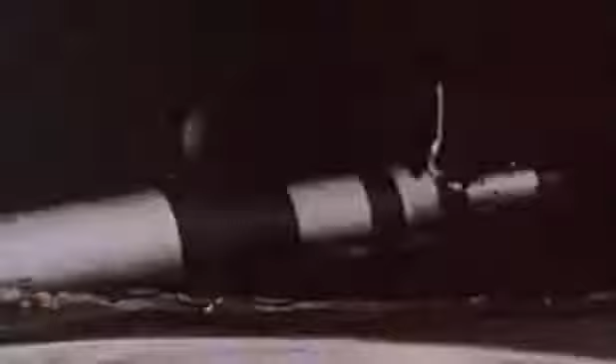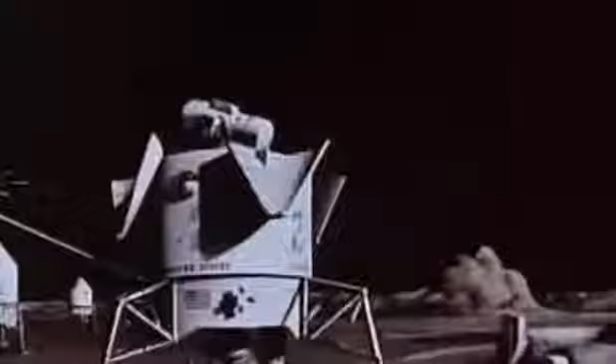This scientific adventure marks the first celestial body that will be explored by man. Landing men on the moon will be a truly great achievement, but only the beginning of a new era in space exploration. No one can predict the exact missions that will follow in the years and decades ahead. But the most exciting possibilities will require the acceleration and deceleration of very heavy loads, such as the maneuvering of large Earth-orbiting spacecraft, the transportation of large amounts of equipment and supplies to the lunar surface, and the sending of heavy spacecraft to the planets.

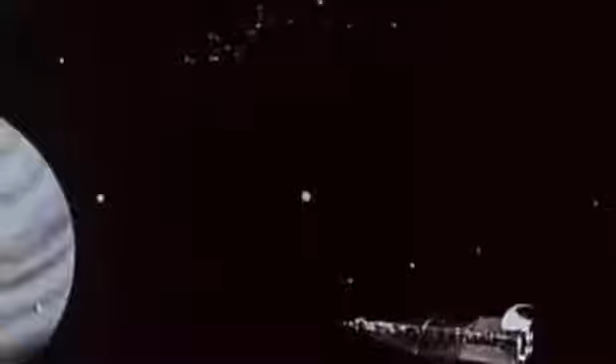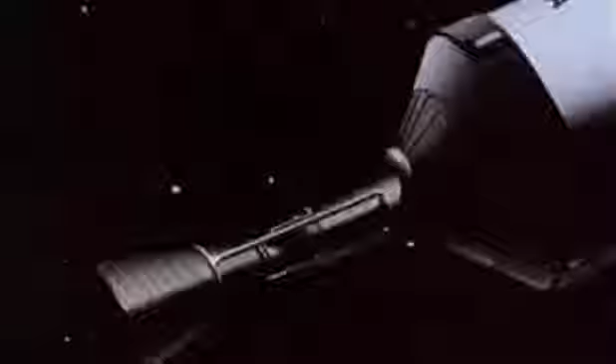Today's missions are being accomplished with rockets that burn chemical fuels. But chemical fuels are heavy, and the cost of putting each pound into Earth orbit is very high. Nuclear rockets, when perfected, can provide the same propulsion energy with less overall weight. They will expand our ability to explore space. This is the story.

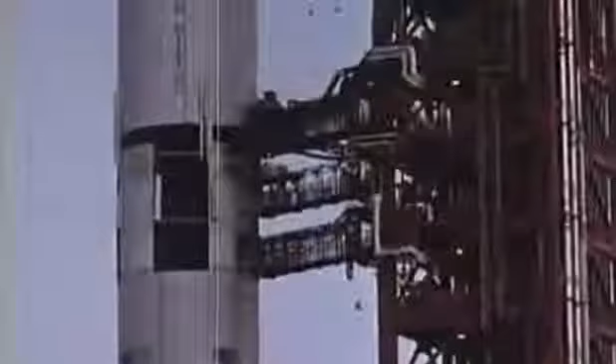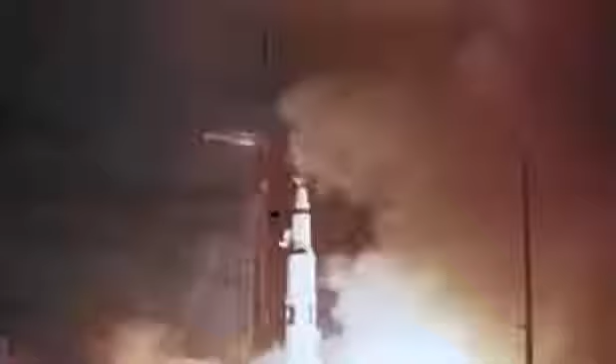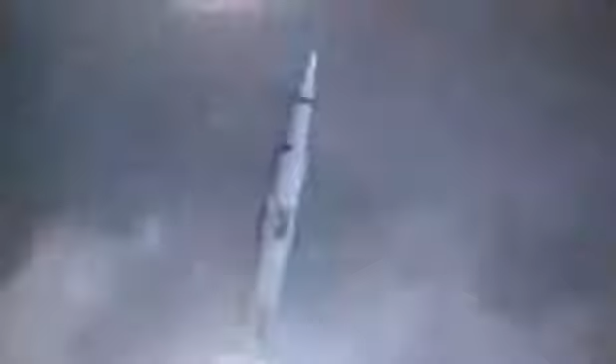This is Saturn V, the most powerful launch vehicle being built by the United States. A three-stage rocket that will place the Apollo spacecraft in the vicinity of the moon. The total weight of Saturn V is about 6 million pounds. Its three stages have chemical engines that burn fuel to generate thrust. The first and second stages provide most of the energy needed to put the third stage and the payload, about 250,000 pounds, into Earth orbit.

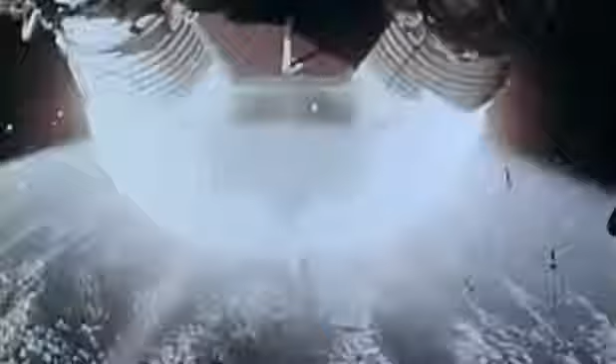At present, only chemical rockets can provide the high thrust needed to do this job. The third stage accelerates the payload to the velocity needed to get it to its destination. Here, travel time and payload weight are determined by the efficiency with which the propellant is converted into thrust.

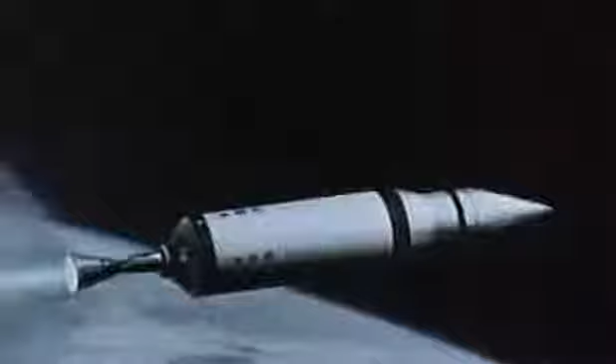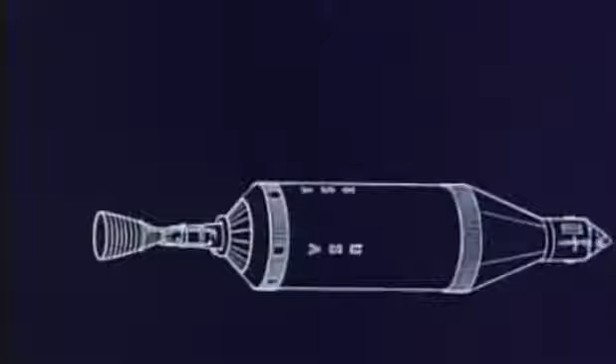By substituting a nuclear third stage for Saturn V, the velocity of a given payload can be greatly increased, cutting travel time for some missions in half. This is particularly important in sending deep space probes to Jupiter and beyond. Or if shortening travel time is not essential, propellant weight can be traded off for an increased payload weight. This is important for a lunar supply mission, Earth orbital operations, and some unmanned missions to the planets.

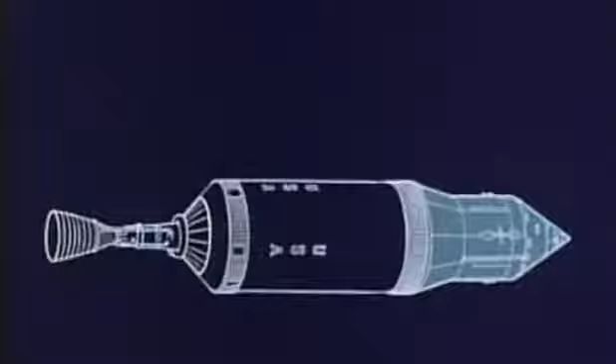Why is the nuclear rocket so much better than the chemical rocket? In rocket propulsion, exhaust velocity determines propulsion efficiency. At a given temperature, the lighter the exhaust gas, the higher the exhaust velocity. And the higher the exhaust velocity, the more thrust is generated for each pound of propellant consumed per second.

The nuclear rocket merely heats hydrogen, the lightest element of all, and expels it at tremendous velocity. Chemical rockets burn fuel to produce exhaust gases that contain heavier elements. So at the same exhaust temperature, the exhaust velocity is much lower, and each pound consumed per second produces less thrust.

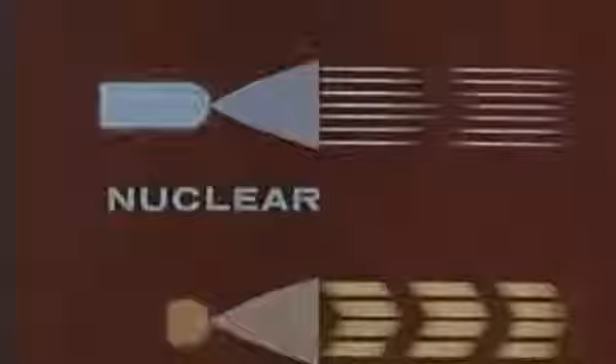Rocket efficiency is stated in seconds of specific impulse. This refers to the time in seconds that 1 pound of propellant will deliver 1 pound of thrust. The higher the seconds of specific impulse, the greater the propellant economy.

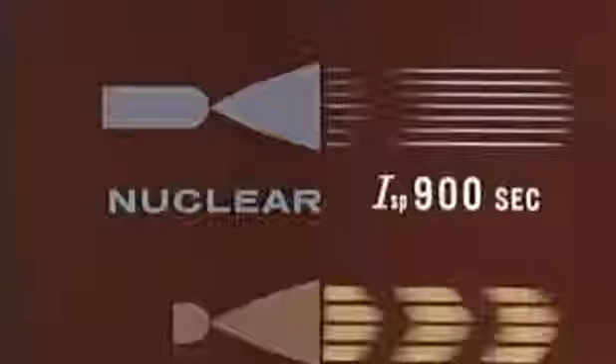Our best chemical rockets of today are limited to a specific impulse of about 450 seconds, and only slight improvement can be expected. On the other hand, full-scale nuclear reactor tests have achieved 800 seconds, and laboratory tests promise even more, perhaps as much as 900 seconds. This means the nuclear rocket, with its lightweight, high-velocity exhaust, will use propellant about twice as efficiently as chemical rockets. This, then, is the principal advantage of nuclear propulsion.

It was at the AEC's Los Alamos Scientific Laboratory, high in the mountains of New Mexico, that the first steps were taken. Here, in the mid-1950s, scientists set about to determine if nuclear energy really could be used to provide rocket propulsion.

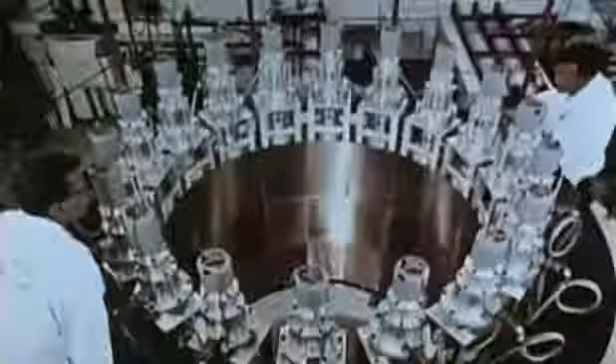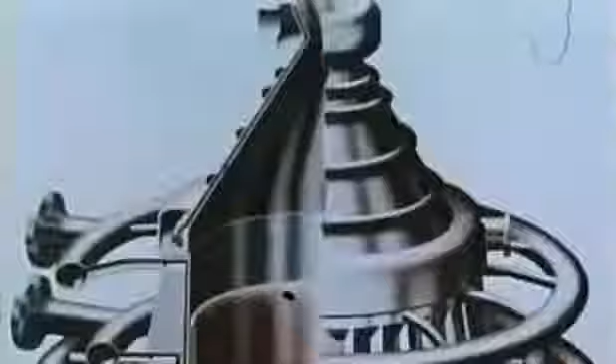Theoretical studies and early experimental work revealed many problems that would have to be solved. Problems in reactor design, material, radiation, structures, control, to name but a few. The nuclear rocket was found to be feasible.

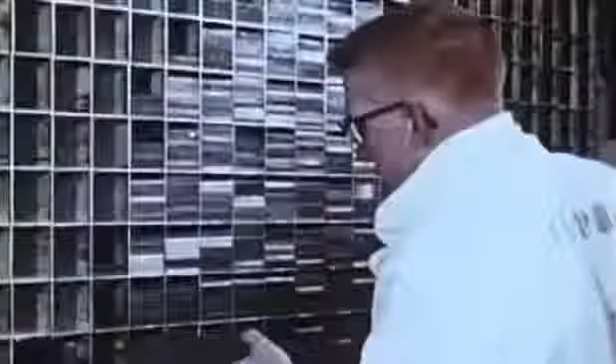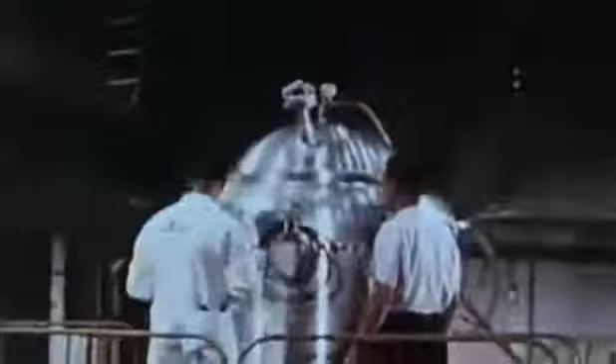A series of experimental reactors was planned to convert theory into workable hardware. Optimum reactor designs were worked out by analysis. Prototypes were built. A comprehensive test program was started. These reactors, called Kiwi, were to be used to prove out design and operational concepts. They would be built only for ground testing.

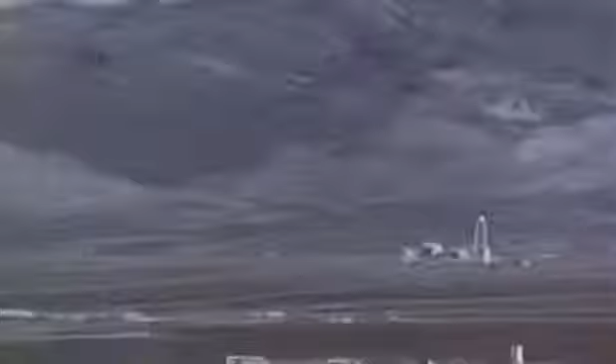All Kiwi power tests took place at the Nuclear Rocket Development Station at Jackass Flats, Nevada. Here in the desert, scientists and engineers checked the actual performance at various power levels and for various time periods.

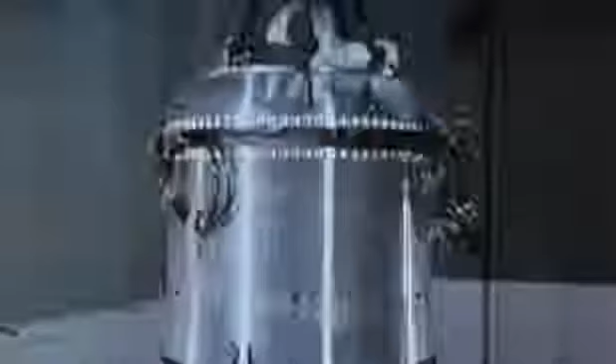Each experimental Kiwi reactor was received in sections, assembled and checked out in a special reactor maintenance, assembly, and disassembly building called simply RMAD.

When the reactor was ready for testing, it was placed nozzle up on a special rail car and delivered to the test stand a mile or so away. This car could be controlled from a remote station. Liquid hydrogen from nearby storage tanks was pumped through the reactor.

First tests were begun in 1959 and were run to the 100 megawatt level, about 1/10 of Kiwi's ultimate goal of 1,000 megawatts. Later tests, beginning in 1962, operated at the full 1,000 megawatts.

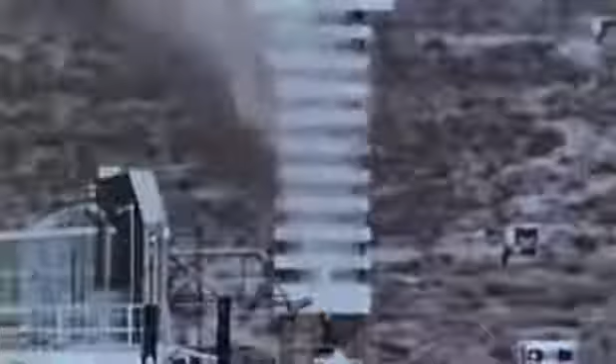Films of these early tests show the flaming torch on the test stand that burns off the hydrogen exhaust gas and prevents an explosion hazard to the test facilities.

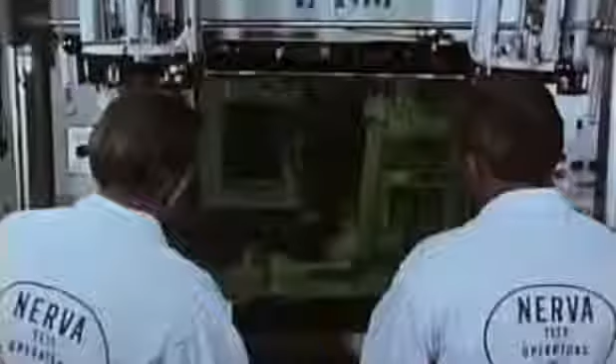Upon completion of these tests, each reactor, by then radioactive, was transported by remote control back to the RMAD building for disassembly and inspection. Here, men working behind shielded walls used remote-controlled manipulators to remove the components for careful checking and analysis. Each test firing added information that helped scientists evaluate the reactor's performance and enabled them to make adjustments and corrections before the next reactor was assembled.

But not all tests showed perfect performance. In this one, for example, the flashing in the exhaust gas indicated a structural breakup caused by excessive vibration. Extensive redesign and testing were needed to correct the flaw.

And in this test, a hydrogen leak caused a fire on the test stand. Again, a correction was made. Each test brought the scientists a little closer to the performance they were seeking.

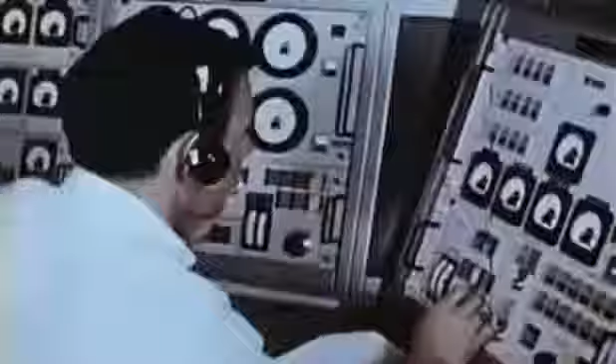Until finally, in September 1964, the 8th Kiwi reactor was brought up to full power and held for 8 minutes, and a few weeks later, it was restarted and operated at full power for 2.5 minutes. Specific impulse, about 750 seconds.

This concluded the Kiwi test series. It had proved that a nuclear reactor could be built that would power a spacecraft.

The next step, already underway, was to develop complete engine technology. This project was called NERVA, Nuclear Engine for Rocket Vehicle Applications. It was to be a combined industry government effort headed by the Space Nuclear Propulsion Office, a joint NASA and Atomic Energy Commission activity. The principal contractors were to be Aerojet General Corporation and Westinghouse Astronuclear Laboratory.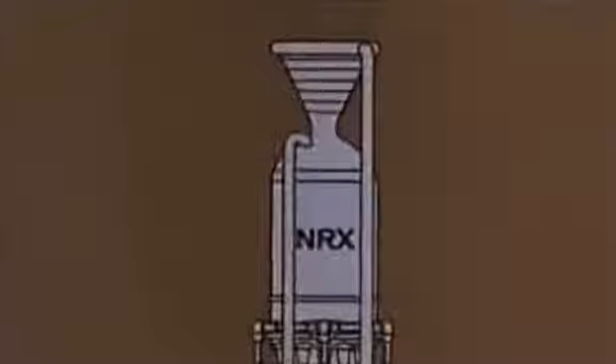The NERVA technology reactor, given the letter designation NRX, was essentially the same as Kiwi, but now the contractors had to extend its lifetime and put it into an engine configuration.

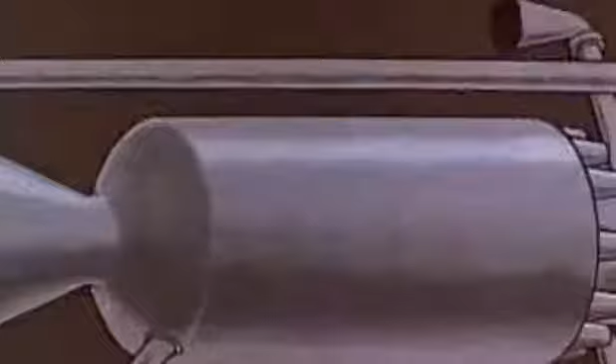Here is how the nuclear rocket engine will work. The reactor is a solid core, heat exchange type, cylindrical in shape. Fission of uranium atoms in the core is the source of heat. A reflector made of beryllium surrounds the core.

The core consists of many graphite elements impregnated with uranium-235 fuel. The core contains a number of channels running down its length. Hydrogen passing through the channels picks up heat generated by the fission process. The channels are coated with niobium carbide, a material which resists the corrosion that would occur if the hot hydrogen were allowed to come into direct contact with the hot graphite.

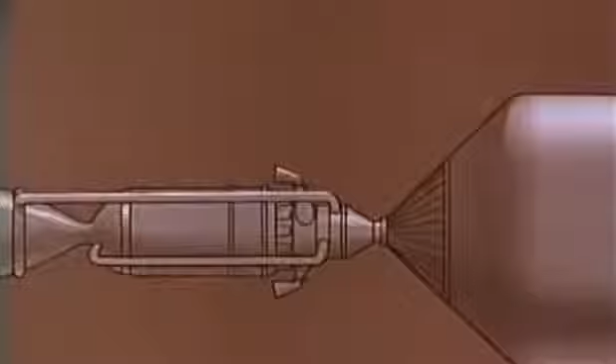The hydrogen is stored in a liquid state to achieve the lowest possible volume. The flight model will use about 1/3 of a million gallons for a 30-minute firing.

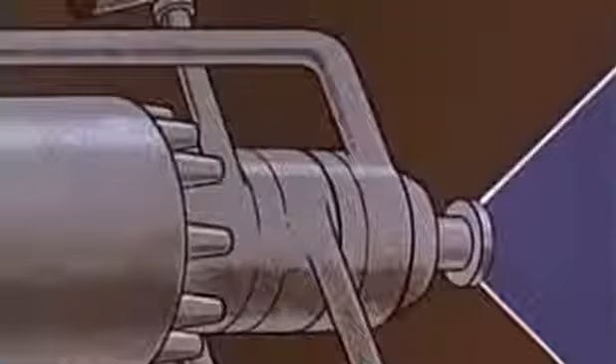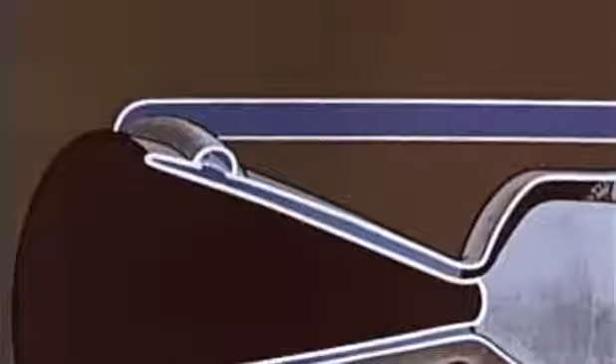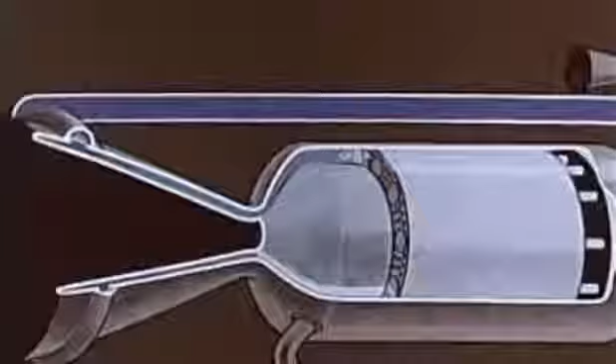To start the engine, the cold liquid hydrogen at minus 420 degrees Fahrenheit moves through a pump down to the nozzle, through internal passages in the nozzle walls, and back up inside the reactor pressure shell and reflector. This cools the nozzle, the reactor shell, and the reflector, and at the same time warms the hydrogen.

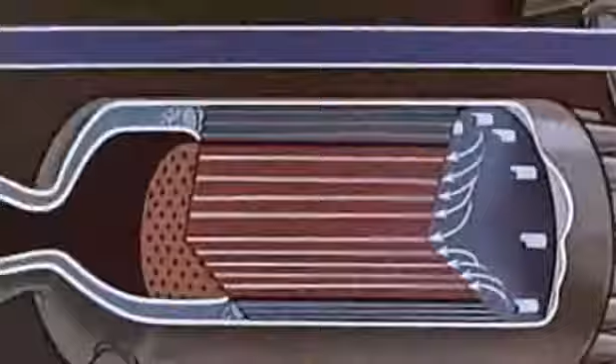The hydrogen then passes through the hot fuel elements where it is heated to about 4,000 degrees Fahrenheit. From there, it is expanded through the nozzle to provide thrust.

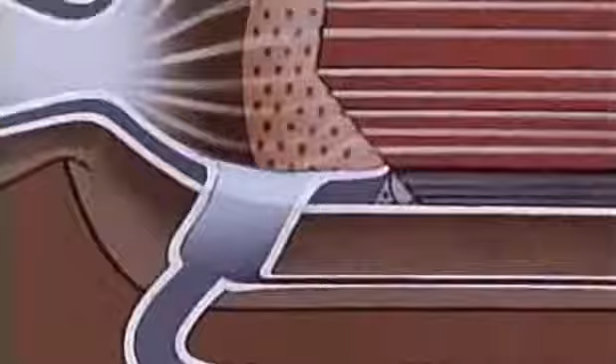The bleed line carries some of the hot hydrogen back to drive the turbo pump. The whole engine system is amazingly compact for a nuclear power source.

The reactor works through fission of uranium-235, which constantly emits nuclear particles called neutrons. When reflected back toward the reactor, these particles will set up a chain reaction, generating terrific heat. The heat is controlled by rotating rods installed in the beryllium reflector around the reactor. The rods are also made of beryllium, but one side is coated with boron, which absorbs neutrons.

Initially, the rods are turned so the boron side is toward the fuel elements, and sufficient neutrons are absorbed to prevent nuclear fission from starting. Beryllium reflects neutrons. By turning the beryllium side toward the elements, a point is reached where sufficient neutrons are reflected for fission to begin. The amount of heat produced depends upon the position of the rods.

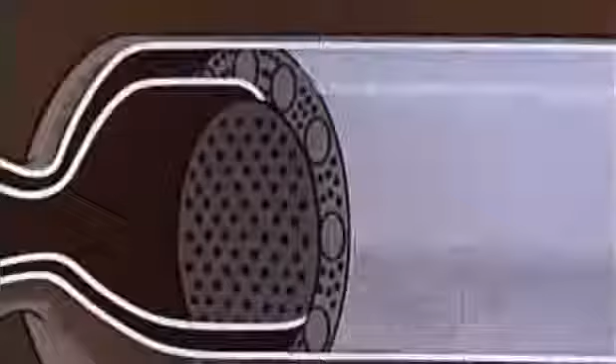Heat increases as more of the beryllium side turns toward the core. When the desired rate of heat production is reached, the rods are turned back to stabilize it. Heat decreases as the rods are turned back. When the boron side absorbs enough neutrons to halt the fission process, heat is no longer generated. These rods can be operated by remote control.

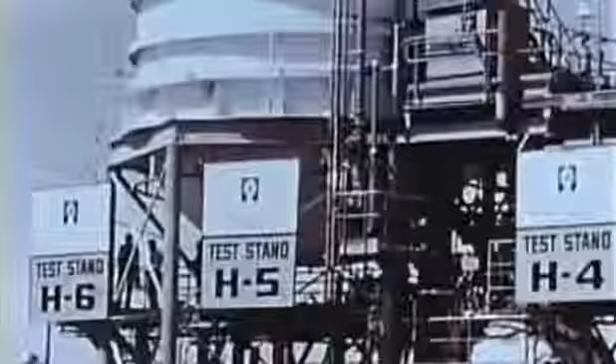Test facilities for engine components were built near Sacramento, California. The problem? Get adequate performance with minimum weight. The pump must move huge quantities of liquid hydrogen under pressure at minus 420 degrees Fahrenheit, while the hydrogen-cooled nozzle must expand high-pressure gaseous hydrogen at 4,000 degrees to low pressure.

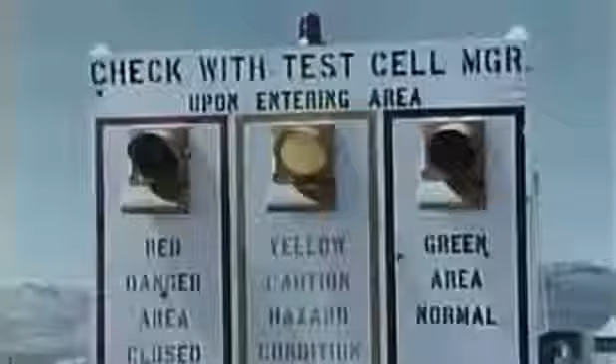The reactor was designed to meet the structural requirements of ground handling, launch, and spaceflight. In a late 1965 test, it operated intermittently for an hour, including 16 minutes at full power. But in that test, as in all reactor tests before it, the hydrogen had been forced through the reactor by test stand pumping facilities instead of its own turbine-driven pump.

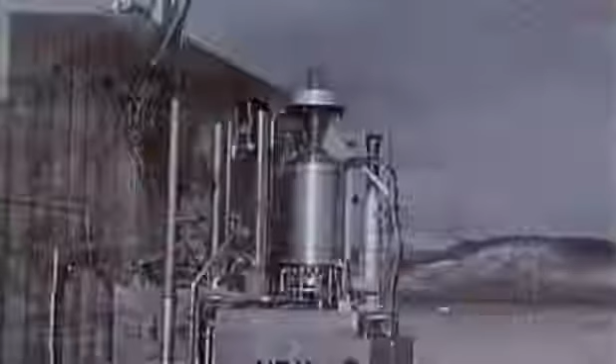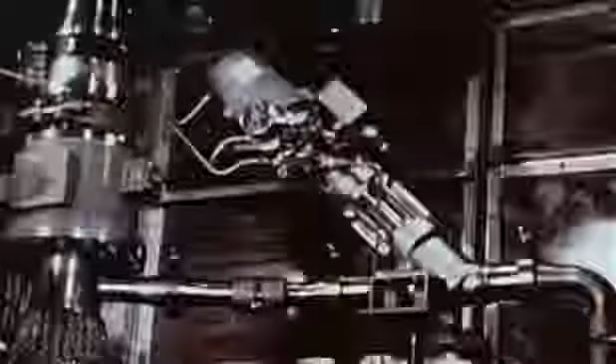In early 1966, the new technology reactor and the chief engine components, including the turbo pump, were assembled for test. It was called a breadboard because they were not arranged as they would be in an actual engine. It would be the first self-starting test, and it was a vital step in the nuclear propulsion concept.

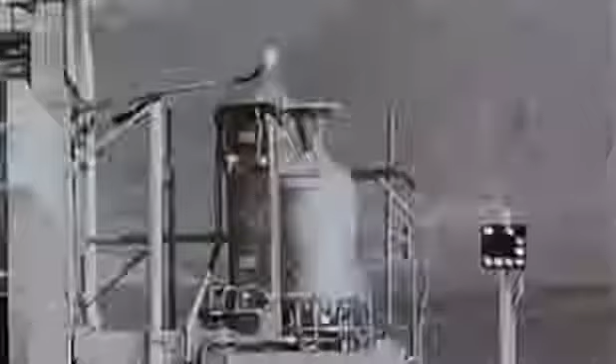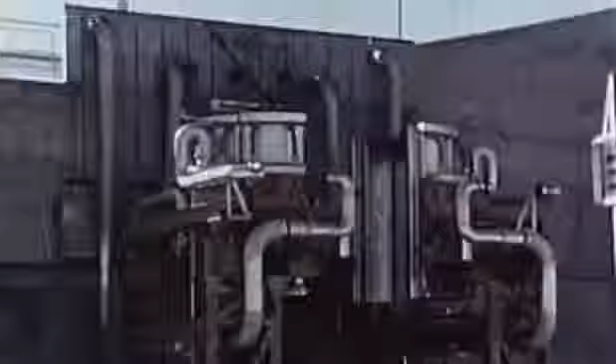This engine test model started perfectly and increased to full power, proving that a nuclear rocket could be started by its own pump. During a 2-month period, it was started and stopped 10 times and operated at different power levels for a total of 110 minutes, 28 minutes at full power. Technology had now advanced to the point where performance limits could be extended. Work was already underway to increase reactor power and operating time.

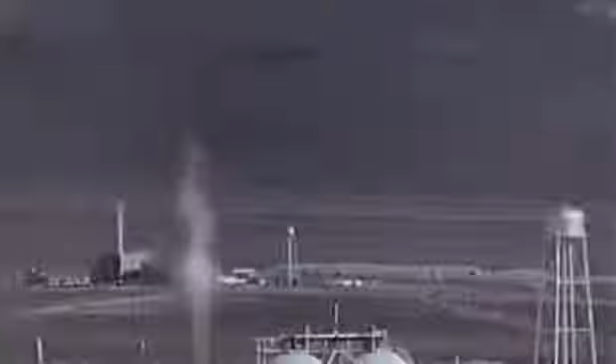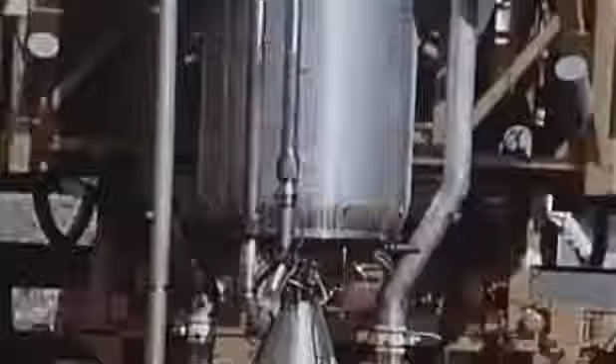In February 1967, this reactor, the Phoebus 1B, was operated at a power level roughly equivalent to 75,000 pounds of thrust. And in December 1967, this reactor, the NRX-A6, was operated at full power for an hour. Also in 1967, a new test stand was completed that would permit a test engine to be fired nozzle down into a vacuum chamber below, at least partially simulating the space environment.

In early 1968, the first ground test engine was mounted in the new stand. Its success was a new milestone along the long road leading to a flight engine. Heavy shielding was used in this test engine to protect some of the components from intense radiation. In flight engines, all components will be radiation hardened and less shielding will be needed.

These tests will complete the technology for a nuclear rocket engine for application to space missions of the late 1970s and beyond. Its thrust will be approximately 75,000 pounds. For missions that require higher thrust, 2 or more of these engines may be used in a single stage, or several engine stages may be assembled side by side. This versatility will give us the capability to perform a variety of advanced missions.

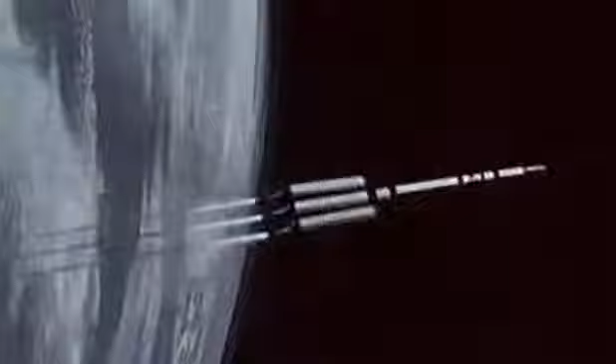Lower overall weight, larger payloads, shorter travel time. These are the chief advantages of nuclear propulsion. The technology needed to build a nuclear rocket is well advanced. It will be available when this nation determines its next great objective in space.